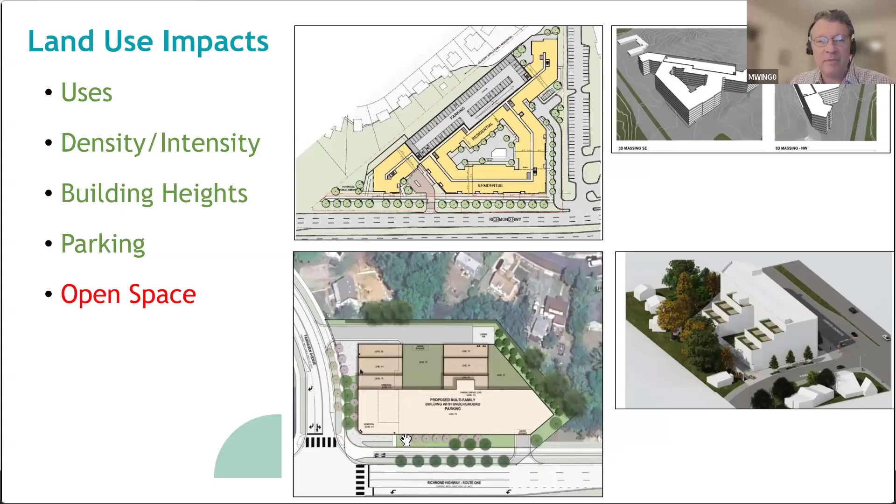There is one major issue that's still unresolved, and that's the provision of urban park space on the site. We'll dig into that a little bit later with more details on another slide.

The Richmond Highway corridor - along this corridor, conformance with the highway corridor guidance is going to be very important as it relates to the analysis of this proposal.

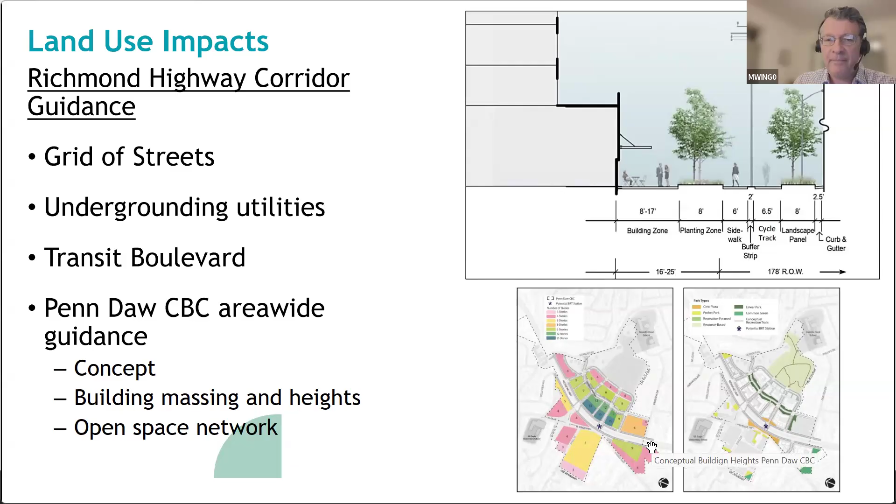That's part of the land bay also, combined to about 0.83 acres. We haven't discussed amongst ourselves what sort of options could be possible. As I said, the current option in the plan is for office, and currently we're exploring what might be possible with these sites. It's a small site combined, and we're taking a look at what replanning options could be added and how it might lay out on the site, including mixed-use development, retail, or some other commercial use. After we have more time to look at those options, we'll be reporting back to the task force with some recommendations.

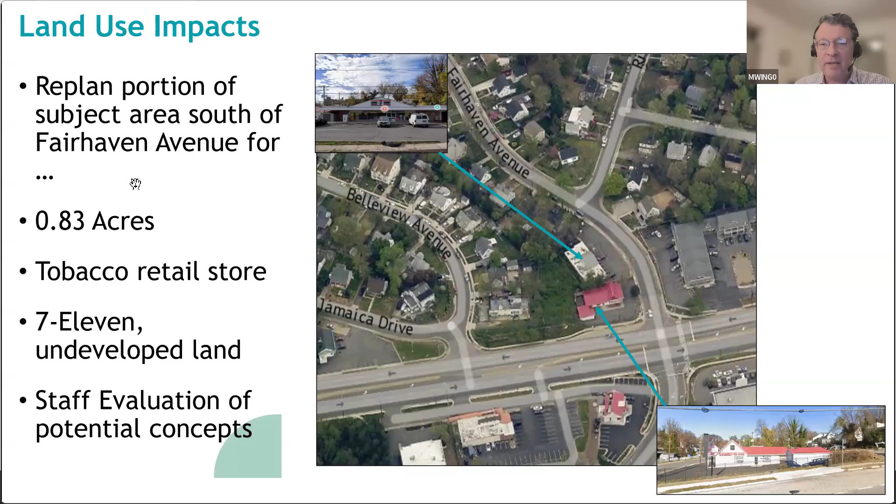The guidelines recommend that the WDU unit mix be proportional to the market rate unit mix, and the WDU should be within 10% of the square footage of the average market rate unit. ADUs are usually preferred over WDUs because they provide deeper affordability, to households earning 70% of AMI versus up to 80% AMI for WDU rental units. I don't think we're talking about for-sale units, but if there were for-sale units with a residential option, it would go up to 100% of AMI. But all things being equal, it's possible with the multifamily proposals that the construction type may not necessarily trigger the requirement for ADUs.

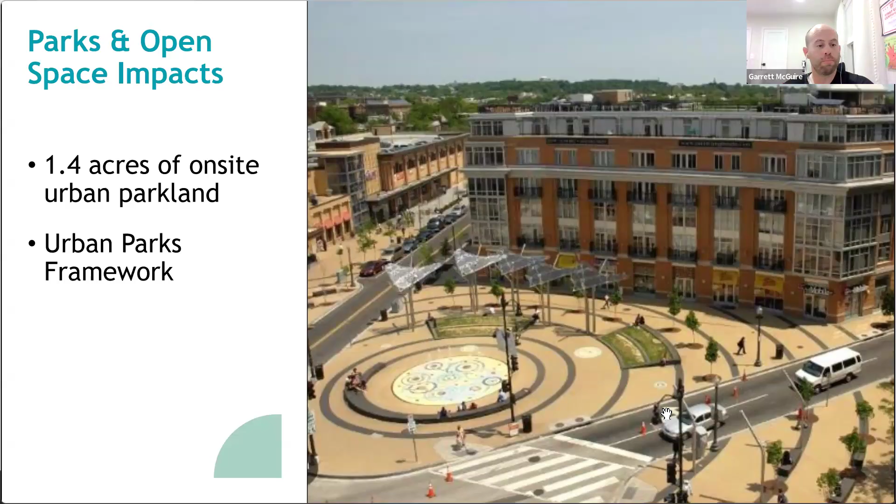Thank you, Kurt. Any other questions on that point?

Okay, then moving back to the heritage resources impacts. So for the Moon Inn, this was built in 1952, formerly known as the Cedar Lodge Motel.

Hey Aaron, you're on the environmental impact slide. Oh, I'm sorry, Mike. Mike, you're muted. Sorry about that, which slide did you want? You wanted the heritage resources impact slide. I still can't see it. Yeah, I've got the heritage up for you there now, Aaron.

Thanks. So again, the Moon Inn was built in 1952, formerly known as the Cedar Lodge Motel. It's not listed on the county's inventory of historic sites, the Virginia Landmarks Register, or the National Register of Historic Places. There were two previous surveys conducted for the property, in the early 2000s and in 2018. These reports were done to evaluate the historic significance at the state and national levels for their determination for eligibility for the state and national registers. But apparently both of these surveys determined that the structure was not eligible for those registers.

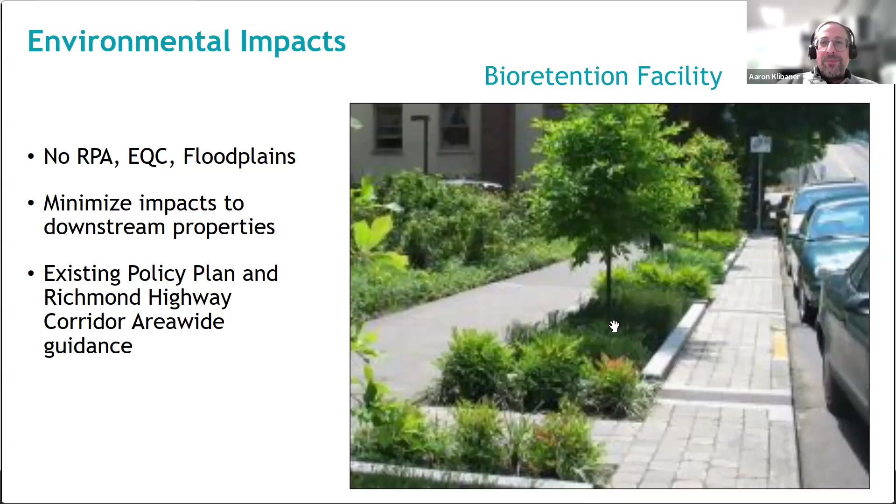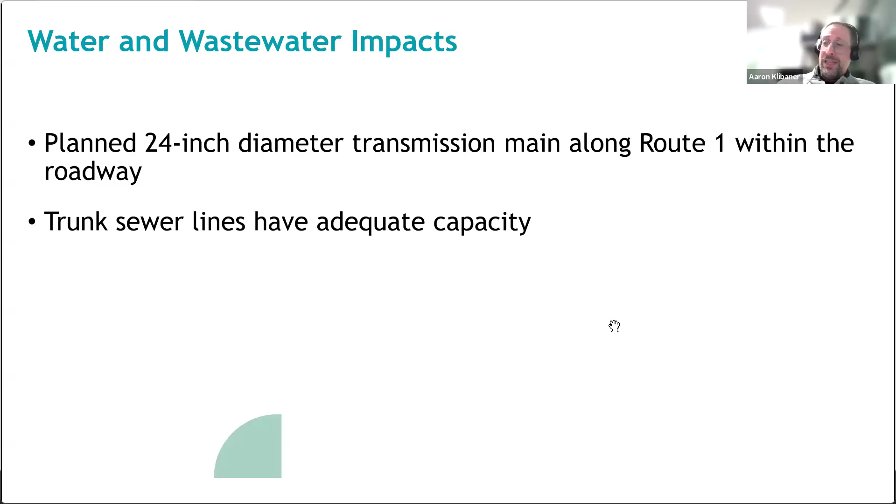I have water and wastewater impacts. So Fairfax Water has indicated that there are plans to install a 24-inch diameter transmission main along Route 1 within the roadway that can meet existing and future water supply demands. And all the trunk sewer lines serving the plan amendment area have adequate capacity to handle the flow for the existing use, adopted plan, and proposed plan. Further evaluation of wastewater and water infrastructure needs will be performed during the review of any rezoning application.

And do you have the timeline slide up? I do have the timeline up. Okay, great.

Basically, as we've talked about before, the next task force meeting is when we hope to have the transportation results of the transportation study ready to present. We'll also present again a discussion of our exploration of the Tobacco King / 7-Eleven area south of Fairhaven Avenue, and talk about open space and parks. We'll present draft plan recommendations at that meeting as well. Again, everything is on here as far as the timeline. It says TBD because, as we said last meeting, we don't know exactly when we're going to get the results of the transportation study.

What I'll try to do is send out periodic emails about when the study has come in, and what the status is of staff and VDOT reviews, and how we're progressing on that. So I'll try to keep the task force up to date on that, and give you an idea of when the date of that third meeting will be.

So, all right. Now we can open it up to the task force discussion.

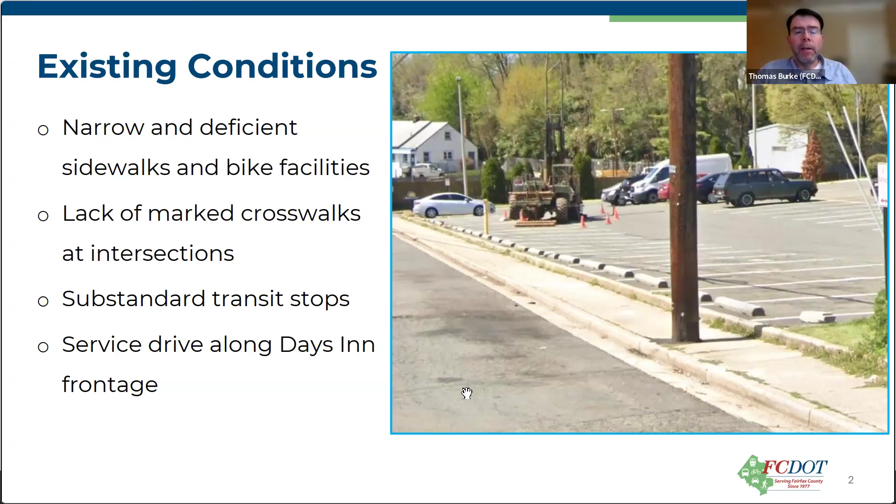There's also a service drive that is an interesting element here as well. Years ago, service drives were all the rage, and for good reason. They allowed parcels that were next to each other to share access points so that we didn't have driveways all the way up and down. We would be able to limit the driveway spacing, but I do believe when everything develops as the comp plan envisions, the service drive in front of the Days Inn would probably go away, and I think we'll see more of that as this process goes along, and there's concepts. Next slide, transit.

On this stretch of Richmond Highway, if you were looking at it in isolation, there are just two bus routes: the 171, which connects Huntington to the Lorton VRE station, and the F1X. I just learned that the Rex is now called the F1X. It connects King Street and Old Town Alexandria with Fort Belvoir.

So these are regional bus routes that provide pretty good coverage, and eventually there will be BRT. There's also a Metro Rail station at Huntington, and existing routes that go to Mount Vernon Estate and other local areas: the 151, 152, 159, 161, and 162.

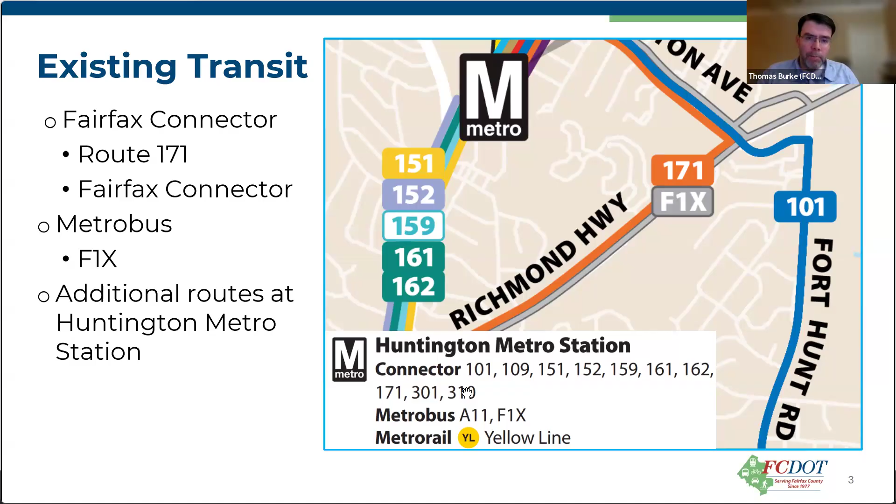Next slide. The comprehensive plan, this is the transportation plan map component of the comp plan. All the areas have these transportation maps, and they outline long-term transportation recommendations.

The BRT connecting Huntington with Fort Belvoir, phases 1 and 2, are in the comp plan. There's a station to be located at Kings Crossing, where South Kings, North Kings, and Richmond Highway all meet. There'll be a BRT station there.

There's South Kings Highway improvements in the plan. You'll notice it's a blue line with a 2 on it. You'll say, well, it's already 2 lanes, but we have a lot of those improvements in the comp plan, mostly because many of these 2-lane roads in the county weren't built to standards—they're lacking turn lanes or bicycle and pedestrian facilities. So South Kings Highway is still in the comp plan for improvements, not to be widened, but to be improved and brought up to standards.

The comp plan has text about building orientation, how we'd rather buildings be on Richmond Highway with parking in the back, instead of like the Walmart out there today, where you have a large surface parking lot with the Walmart kind of in the back. We want to flip that and have a more urban feel.

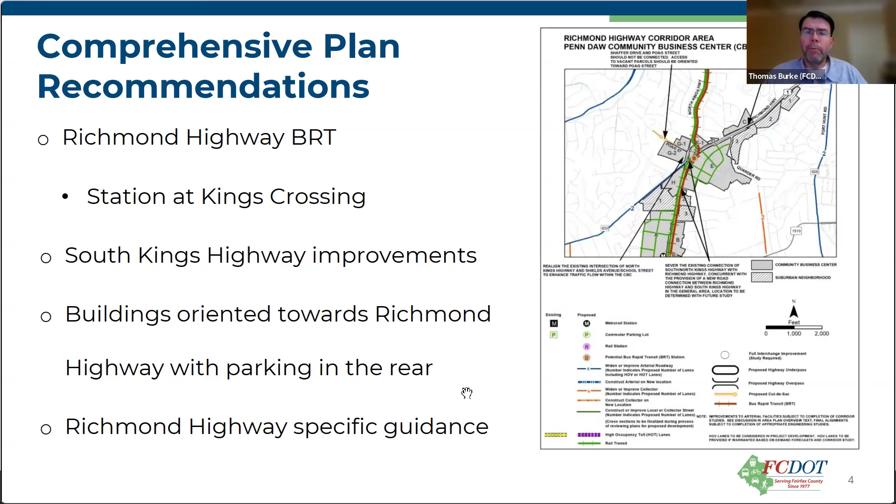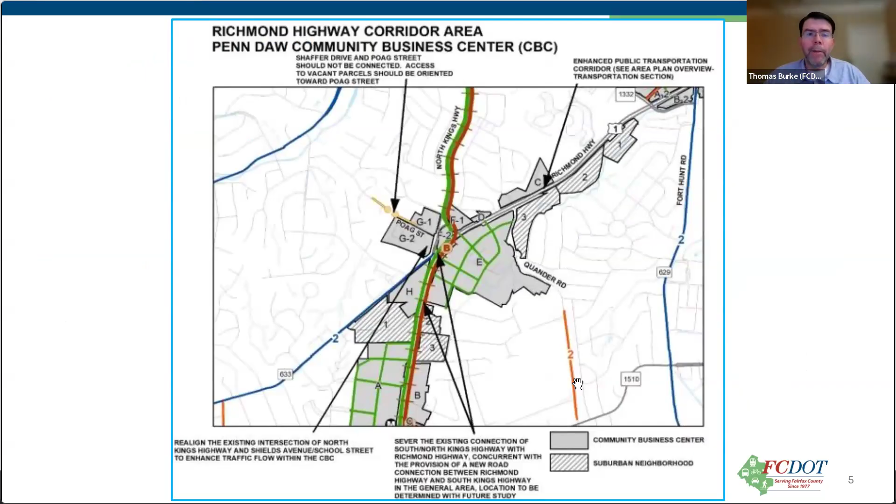Next slide. This is just a zoom in to show a little bit clearer what the transportation plan currently calls for in the Richmond Highway corridor and the CBC.

Next slide. This is something I've been involved with on and off for about the 16 years I've been with the county. I've always enjoyed working in the corridor. One of the big things was the Embark Richmond Highway Plan, adopted in 2018, but it was a several-year effort leading up to that. A lot of you were involved as well, and we developed typical cross-sections for Richmond Highway.

This one was in Mike's earlier presentation, and it focuses on the streetscape—a 178-foot public cross-section that includes a 6.5-foot cycle track, a 6-foot sidewalk, a wide buffer for landscaping, and a 2-foot space between the sidewalk and cycle track for utility poles if needed.

There's been a lot of discussion about undergrounding, so hopefully as the corridor develops, all of those above-ground poles will go underground. And then there's also the building zone.

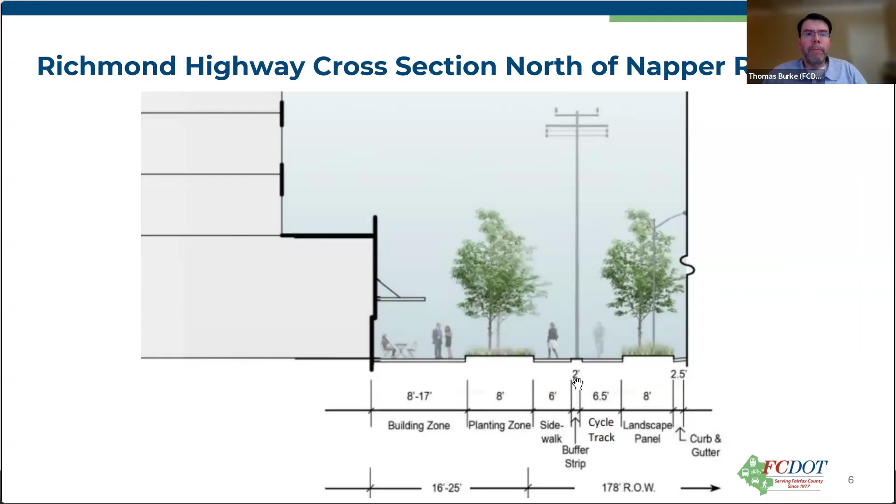There's the countywide trails plan as well. It includes major paved trails on Richmond Highway and South Kings Highway, and I think the recommendations for that cross-section with the 6-foot sidewalk and 6.5-foot cycle track represent what the recommended trail was, or is, in our trails plan. It's in the spirit, though not exactly—the trails plan has been around since the 70s, and a lot of these recommendations are evolving.

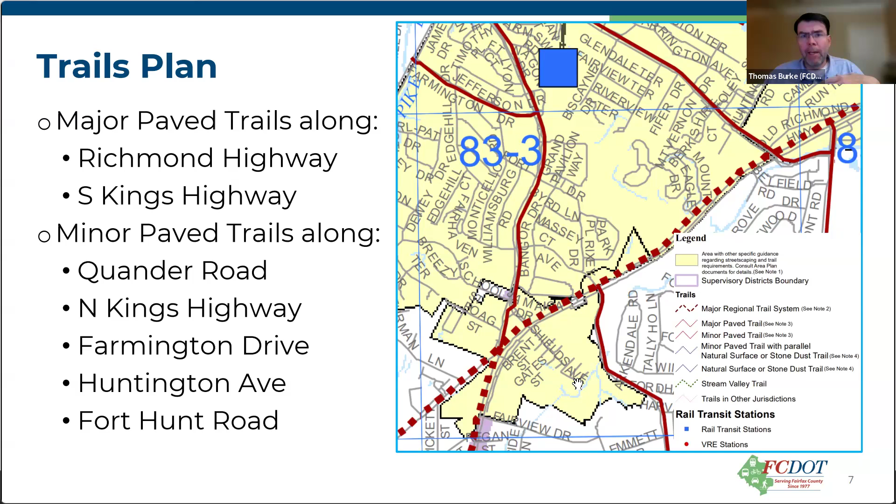Some of you may be aware that our active transportation team is in the process of combining the bicycle master plan, which we'll see on the next slide, with the trails plan to create the Active Fairfax plan. It's going to combine everything, remove redundancies and inconsistencies, and be much more up-to-date.

As you can see in the bicycle master plan, there's not a lot here to really chew on. I think that's because the bicycle master plan was adopted in 2014, when the Richmond Highway work was just starting and Embark wasn't quite up and running yet.

So the active transportation folks back then, 11 years ago, just made Richmond Highway that pink color policy road. That basically was punting or deferring decisions to the future. Then over the last 10 years, we've made a lot of those decisions with the cycle tracks and the sidewalks. That's why you just see a pink line on Richmond Highway.

The dark blue dash lines are on-road bike lanes on Huntington Avenue, Fort Hunt Road, and Quander. The light blue are sharrows, if you're familiar, where the lane is shared for both cars and bicycles. Often you'll see that bicycle symbol with the arrows.

To be honest, a lot of these recommendations from 2014, while they may have been consistent with what was all the rage back then, over the last 11 years we've come to realize that on-road bicycle lanes on some of these higher speed, higher volume facilities don't make as much sense anymore. So we're moving towards separated facilities like the cycle tracks, and I think a lot of that will be corrected with the Active Fairfax plan.

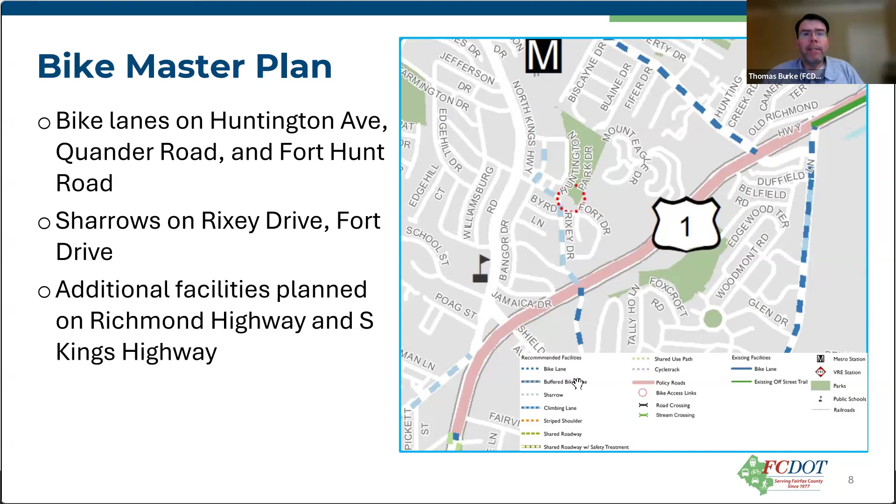And then finally, I'm sure you're all familiar with the bus rapid transit. The Department of Rail and Public Transportation did the study that culminated in a report in 2015. Then the county took the baton and did the Embark Richmond Highway planning. Now the bus rapid transit team in our capital projects division is trying to get it through to design. I think they're now thinking it'll open somewhere around 2033.

There it is right there. It'll connect Huntington Metro to Fort Belvoir. There is a third phase to Woodbridge VRE that is not yet in our comp plan. We're actually replanning Lorton at the moment, and we're having some discussions about whether we want to add the third phase of BRT to Woodbridge as well.

There are 9 stations currently between Huntington and Fort Belvoir. While our site that we're talking about tonight isn't on the BRT, it's walkable to and from the BRT. So hopefully people may choose to live there, whether they work south on the corridor, or because they want to get to the Huntington Metro easily, and hopefully some of them will work in the corridor as well.

The BRT will run in center median exclusive running lanes, so only the BRT vehicles will be in the median using these lanes. That's to provide a time benefit so that the buses are not stuck in traffic like the cars are.

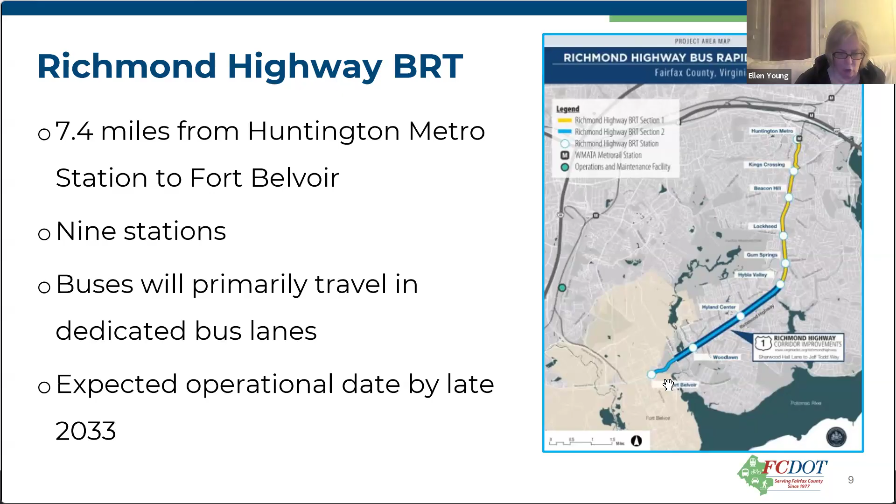But I do have a couple of concerns about a couple of other things. One is the possibility of requiring the nominator to do an architectural survey, and the other is requiring them for 1.4 acres of parkland. I understand there are standards with the county. What I don't want to see is these things pushed to the point where it's no longer profitable for the development and it falls apart, or it just takes longer for any kind of development plan to come to fruition. So I think the county needs to maybe be a little more flexible in some of the things they might require. That's my thoughts.

Thank you, Ellen. I'm sorry, this is Lynn Pasco. I can't find my hand to raise at the moment, I apologize. First, let me totally support what Ellen just said about not letting smaller things get in the way of nothing happening. We've had too much experience with that in the past, and we need to get beyond it and get serious. Second thing, and this is for Tom, I think everybody knows that the Quander Fairhaven intersection with Route 1 is a total disaster.

Particularly when we go through it with some regularity, to get to Montebello I often come down and turn left. In the first place, the left turn lane is so short that it still blocks all the way back up because nobody can get on it. Secondly, when you start crossing it, people from the other side keep coming along and you can't see them, and you have to duck.